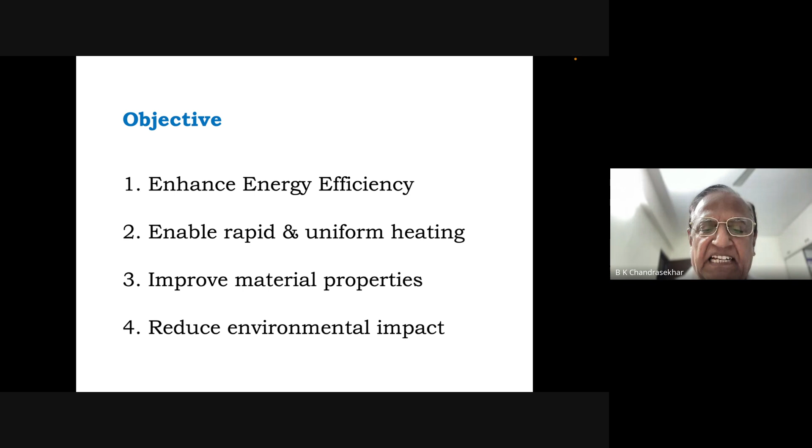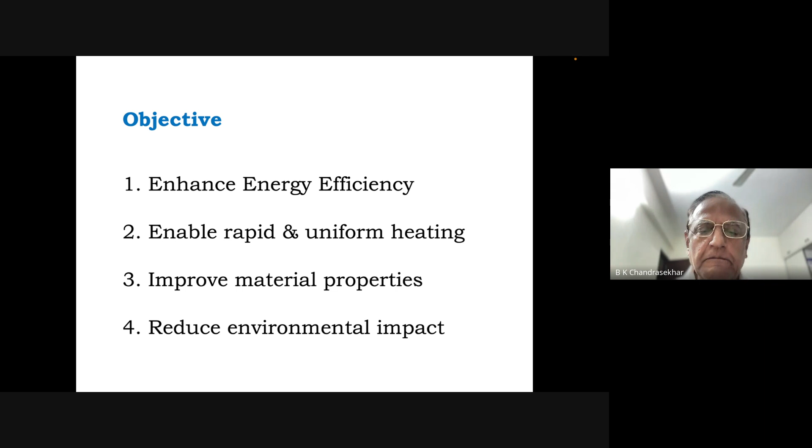I hope my accent and pronunciation is clear to everyone. Once in a while, I will give some time for you to ask questions. So please feel free to ask any doubts or questions, even midway through the talk. Am I clear in my voice? Yes, sir. Thank you.

Now, what exactly is microwave material processing? As you all know, microwaves approximately belong to a frequency range of 300 megahertz to 300 gigahertz. So it's a wide range, and this region is called microwaves. The majority of the frequencies are used for communication purposes, like our mobile phones, radar, and many other things.

But for drying and heating purposes throughout the world, only two frequencies are allowed: one is 2.45 gigahertz, and the other one is 915 megahertz. Only these two frequencies are allowed for industrial purposes of heating and drying.

And over the years, a large number of different sectors, including ceramics, polymers, metallurgy, composites, food processing, even waste disposal, and all possible sectors, one can use microwave very efficiently and at a relatively lower cost.

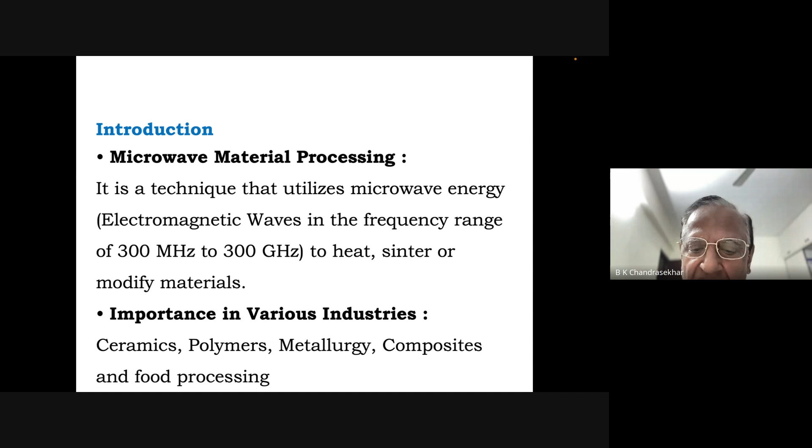So I was talking about the lower carbon footprint and other things. Basically, microwave can be used for any sector where there is a requirement of any type of heating. The normal way of heating is typically, if it is a foundry type of application, people use induction heating for melting metals and so on. For ceramics and other materials, people use resistance heating. Even for polymers, they use resistance heating, like in an oven.

So in what way is microwave superior over conventional heating? As I mentioned earlier, it is an extremely fast method of heating, therefore your process time is very much reduced. There are applications where the process time can be reduced from 8, 12, 14 hours conventionally to less than 1 hour using microwave. That gives you tremendously higher productivity and throughput without compromising on the quality of the product or on the cost. And it is a highly energy efficient method.

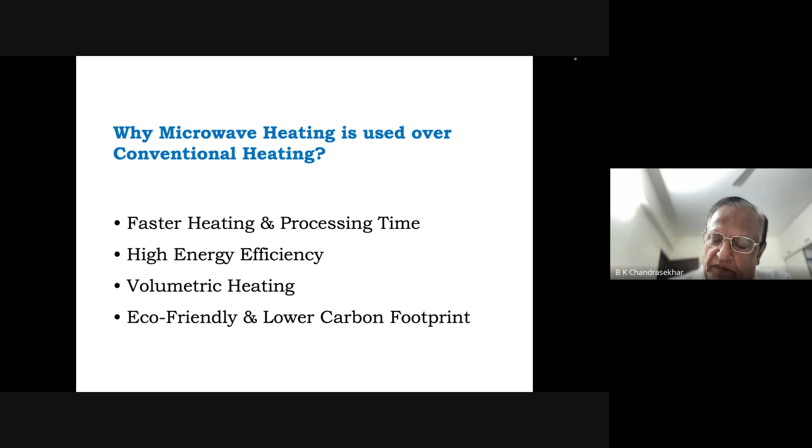Now, this is a summary of some of the things that I have already talked about. As I mentioned earlier, we only use 2.45 gigahertz. That's the one particular frequency that is normally allowed in India for this type of application. We call the heating method dielectric. This method is based on what is called the polarization of the samples. And we will talk, either in this talk or the next, a little more in detail about the principal method by which microwaves interact with the material so that heating takes place.

Third thing is it's a non-contact method. The sample is not coming in touch with heaters and things like that. And it can penetrate thicker samples quite well. And it is a non-ionizing radiation. That means there is no risk involved like cancer and other things. And there are a lot of microwave myths associated, and I would like to spend some time on this a little later.

Now let us understand what exactly happens when microwave radiation is incident on a sample. Microwave is very similar to light. Therefore, the incident microwave radiation can get reflected, transmitted, or absorbed in the material, just like light, and it can also get scattered. All these mechanisms do take place.

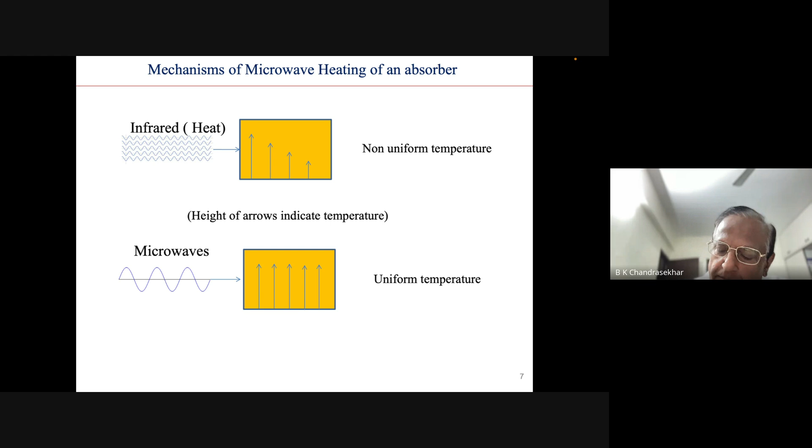The energy efficiency is very high in microwave heating, almost to the extent of 80 to 90% in some cases, because only the sample gets heated and the surrounding crucibles, the insulating materials or any other thing is not getting heated. Therefore, there is a tremendous amount of energy savings compared to conventional heating. And in some cases, you can heat only a portion of the sample selectively rather than the bulk of the sample, which is not possible in the case of conventional heating.

And again, the uniformity of heating is much better in microwave heating compared to conventional heating because of the volumetric heating mechanism that I explained earlier. Now, before I go further, I would like to know whether there are any questions.

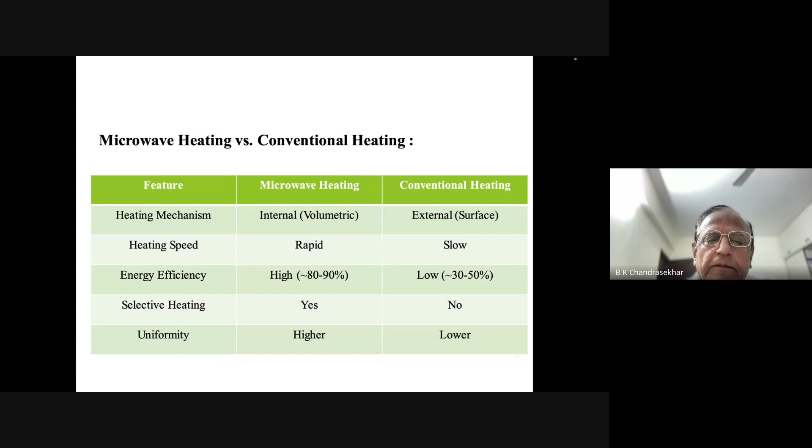Now, I keep talking about electromagnetic properties. Basically, there are 2 or 3 electromagnetic properties that are very important for microwave applications. One is called the dielectric constant epsilon. This epsilon is a measure of the capacity of the material to store energy, store charges. And the other one is called epsilon double prime, sometimes called epsilon 2, which provides the amount of heating, because of the absorption, the transformation that takes place from absorption to high temperatures. So epsilon 1 and epsilon 2, sometimes called epsilon prime and epsilon double prime, are the 2 important parameters which one should know when dealing with microwaves.

These 2 parameters are dependent not only on the wavelength of the microwave, but also on the temperature. This graph provides an overview of how the dielectric constant epsilon 1 or epsilon prime varies with temperature as well as with frequency. As you will see, as the temperature is increased from 0 degrees to 20, 60, 80 degrees centigrade, the dielectric constant becomes lesser and lesser. That means the capacity of the water to store charges is very much reduced.

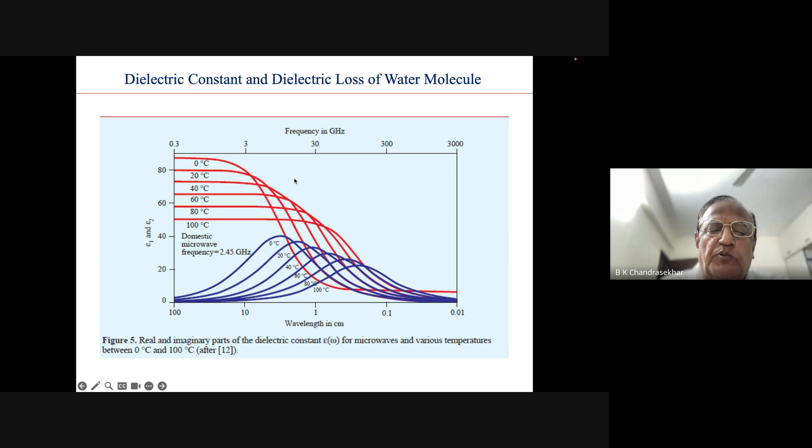Now, there are a lot of myths associated with microwaves. I'm sure you all would have heard sometime or the other on this point. Does anyone know about some of the comments that you have received in the public domain about microwaves? Hello?

In case you have not heard, about 4 or 5 years ago, there used to be a WhatsApp message floating around very widely saying that Samsung is going to stop manufacture of cooking ovens by 2024 or 2025 because some laboratory in the US has confirmed that cooking food using microwave causes cancer. This is basically a fake message that is being sent to harm Samsung or other reputed manufacturers of microwave ovens.

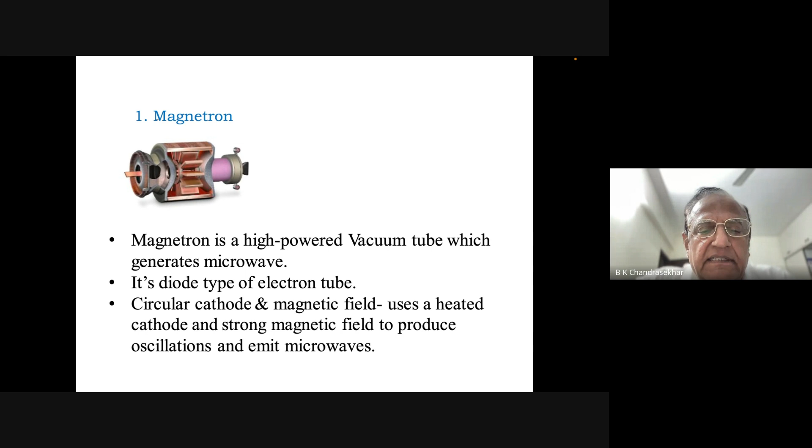In fact, this technology is quite complicated, and to the best of my knowledge, most of the microwave magnetrons are imported into the country. I don't know about any defense related labs which make their own, but at least for household kitchen type of applications, the magnetrons are usually imported. And even our company, Enerzi Microwave Systems, we also import the magnetron from outside. This is the one that generates the microwave energy. Then there is a waveguide.

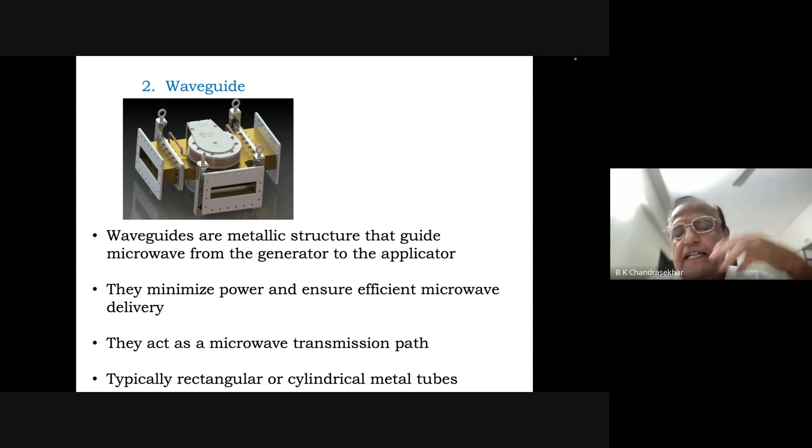This waveguide is usually some kind of a metallic structure that allows the microwave to travel from the magnetron to the other parts of the oven or a furnace or whatever it is. And usually in this process, we want to ensure that the energy of the microwave is not lost. Therefore, everything is getting reflected without any absorption, and therefore the efficiency of transmission is very high. These waveguides are typically either rectangular or cylindrical in nature, depending upon the end application.

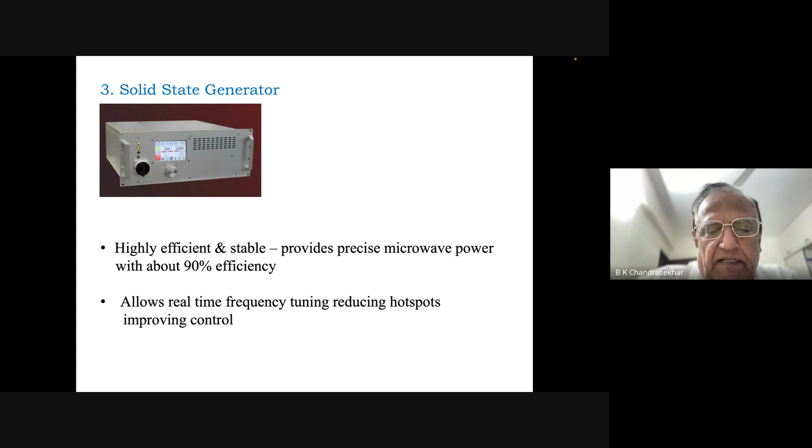The third part of the system is what is called the solid state generator. This basically allows the control of the microwave power. In most of the systems, one will be able to vary the power of the microwave magnetron from very low to the maximum level. So these solid state generators take care of that, and also allow the fine tuning of the frequency required exactly to 2.45 gigahertz.

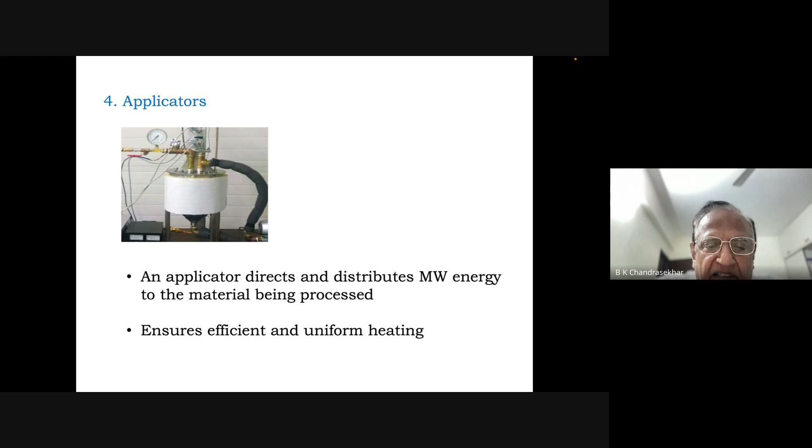And the last component is what is called an applicator, which directs the energy from the waveguide into the material or the object or whatever it is that needs to be processed. It's called an applicator. Basically, these are some kind of a funnel shaped material, and this allows efficient and uniform heating of the object.

Now, let us talk about some examples where the microwave is used for processing of materials. The first one is ceramics and composites.

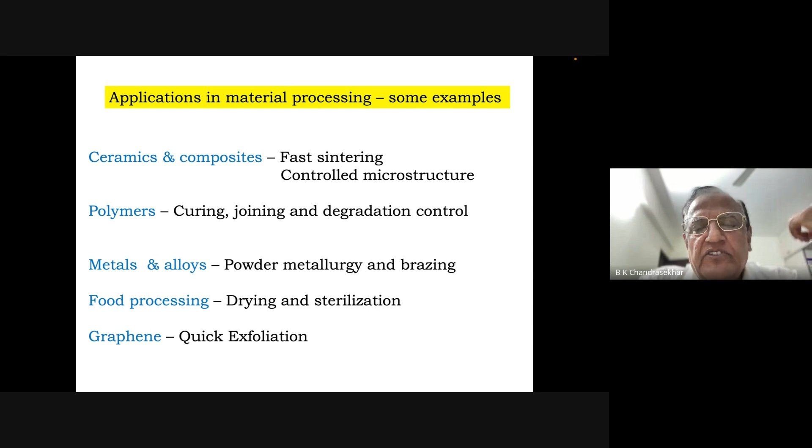As I mentioned earlier, ceramic means usually inorganic materials like alumina or aluminum oxide, magnesium oxide, some silicates, porcelain, zirconia, titania, so on and so forth. These are all very high temperature materials. Typically, the melting point of these materials is about 1500 degrees and so on.

And one very good example would be the alumina substrate that is used in integrated circuits. You make a high alumina material, which is very thin and extremely flat, on which you deposit your circuits. And that alumina material also acts as an insulator for the rest of the electronic system, but also provides a conducting path for the heat that is generated in the circuit.

And the strength of this material depends upon what is called the microstructure. That means when you look at the sample under a microscope, typically a scanning electron microscope, you will look at what are called the grains of the material. That means the particles are attached to each other with some particular size. This microstructure controls the macroscopic property of the material.

For example, let us say that you are having a tungsten carbide material, and tungsten carbide is supposed to be an extremely hard material, and it is also supposed to be a very strong material. In order to get a very strong and hard tungsten carbide material, the microstructure has to be very fine. That means the grains of tungsten carbide as seen in a scanning electron microscope should be very small, typically of the order of 1 micron or 1.5 micron.

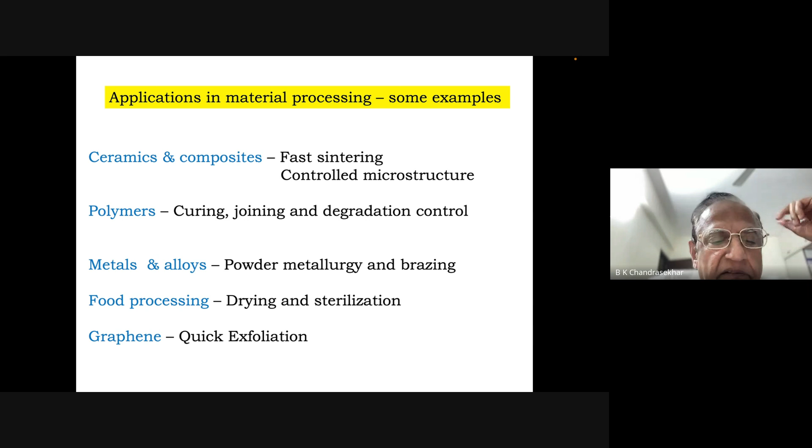The other application in food processing is what is called sterilization. Most of the food items do get some kind of bacteria and other things, and they spoil the food. By giving a microwave treatment to the food, all these viruses, bacteria, and other microorganisms are completely destroyed, and therefore the food will last much longer. This is being done very widely in Western countries. But in India, it is not being done to the extent that is required.

And the last one, as an example, I'm talking about graphene. I am sure most of you would have heard about graphene. It's one of the most wonderful materials that has been discovered in the last 15-16 years. The standard way of making graphene is to take a graphite material and inject it with some ions like potassium in between the layers of the graphite, and then quickly heat it to about 900 to 1000 degrees centigrade, so that the layers of graphite are separated, giving rise to graphene.

This process is quite time consuming, because you need to heat the material to 1000 degrees centigrade, and you cannot heat it very fast by conventional methods. And we in Enerzi microwave system are able to do this task within less than 5 minutes. We take the treated graphite material, expose it to microwave, and within 5 minutes or even less, the temperature goes up to 1000 degrees centigrade and exfoliation takes place. Any question on this?

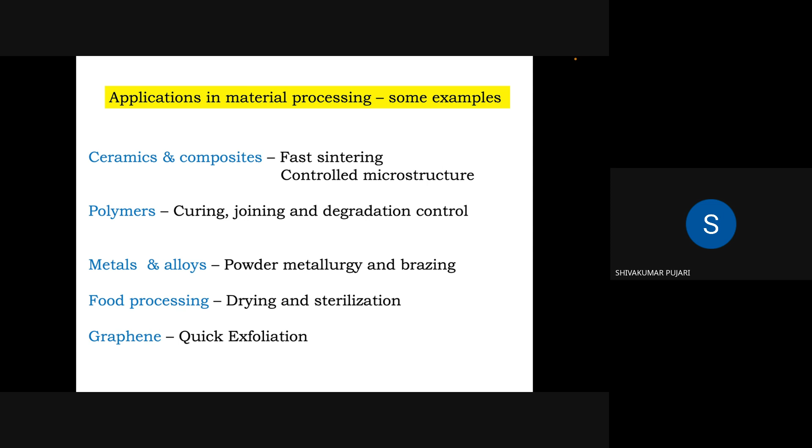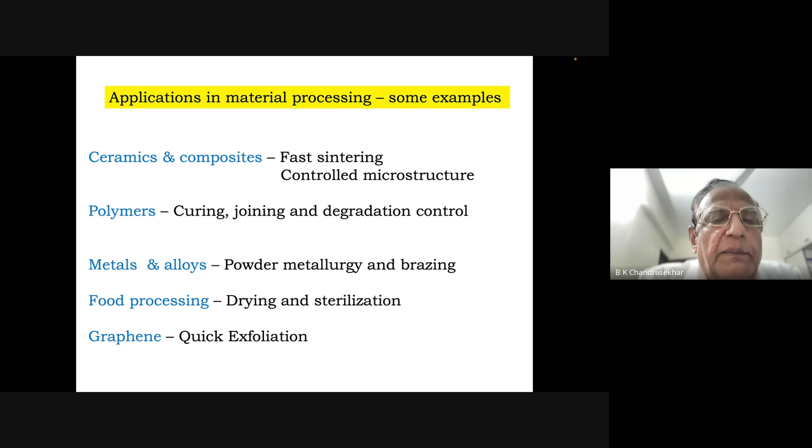Now there is one more issue that comes up: some polymers or even ceramic materials do not absorb microwave, so what to do with them? Suppose I have a ceramic material and I apply the microwave, it doesn't absorb. Then how do I sinter it? There is a technique for overcoming that, and I will talk about it a little bit later.

So basically, the advantages of microwave processing are, definitely, it is a very, very fast process. Instead of cool to cool taking 1 day or an 8-hour shift, it can be done in a few minutes, or at best less than 30 minutes. Energy efficiency is very high, and superior material properties. And I will talk about the microstructure in my next talk.

As I have already mentioned, when you heat a material to a high temperature for a long period of time, like 2 hours or 1 hour, then there is a mechanism that takes place called grain growth. That means the grains become bigger and bigger, and as they become bigger, the mechanical properties, transparency, optical properties and other things are compromised. By using a microwave, you can avoid this grain growth of materials.

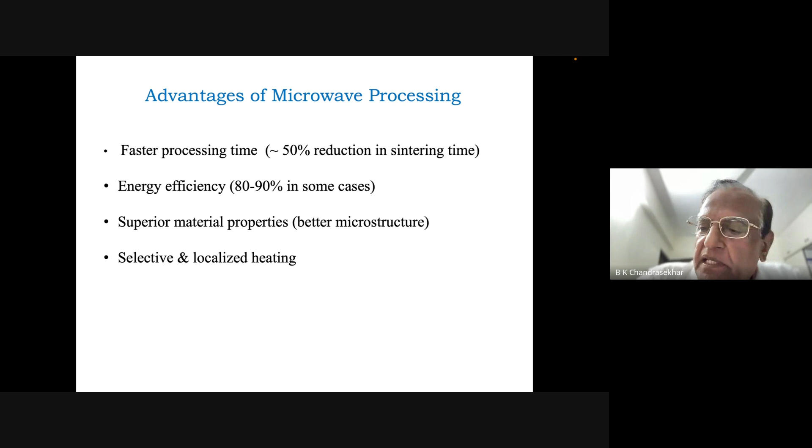Then there is selective and localized heating. For example, you take a plastic and for some reason you need to make it into a mixture with some microwave absorbing material, then you can still heat the material.

Now, let me talk about what exactly are the future trends in this particular area. One is what is called the hybrid heating technique. Let me elaborate a little bit on this. Let us take a standard material called aluminum oxide, which is a workhorse for most ceramic materials. Most ceramic materials have a certain amount of aluminum oxide present in them, and aluminum oxide is transparent to microwaves.

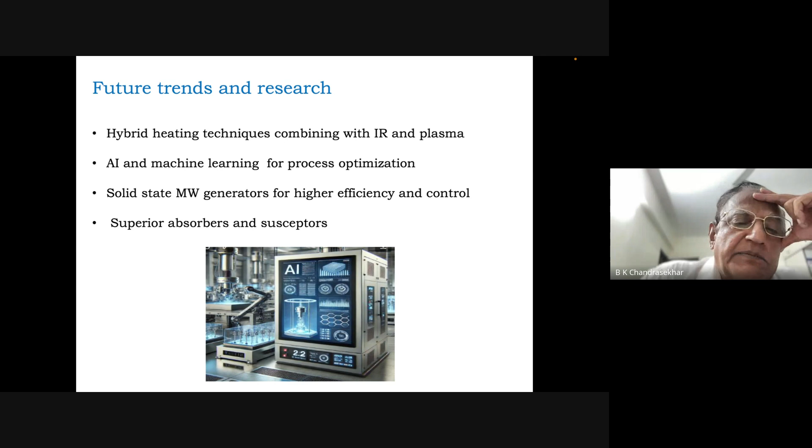So when you want to sinter aluminum oxide and put it in a microwave furnace, it doesn't absorb the microwave radiation, and therefore it cannot be sintered. So one method for overcoming this problem is you take the material and heat it with resistance heating up to about 600 degrees centigrade.

That means you use electric heaters and heat the sample to 600 degrees centigrade and then apply the microwave. What happens is that at about 600 degrees centigrade, the electromagnetic properties of that aluminum oxide material change and it starts absorbing the microwave radiation. So this system is called a hybrid technique.

So you preheat the material with a conventional method like resistance heating, and once about 600 degrees centigrade is reached, you switch that off and go in for microwave radiation. Then you can take the sample to 1400, 1500, 1800 degrees centigrade also. So this is one method of heating materials which don't absorb the microwave initially. Surprisingly, most materials at elevated temperatures become microwave absorbers, though they are not microwave absorbers at room temperature. So once you know this, this technique can be used.

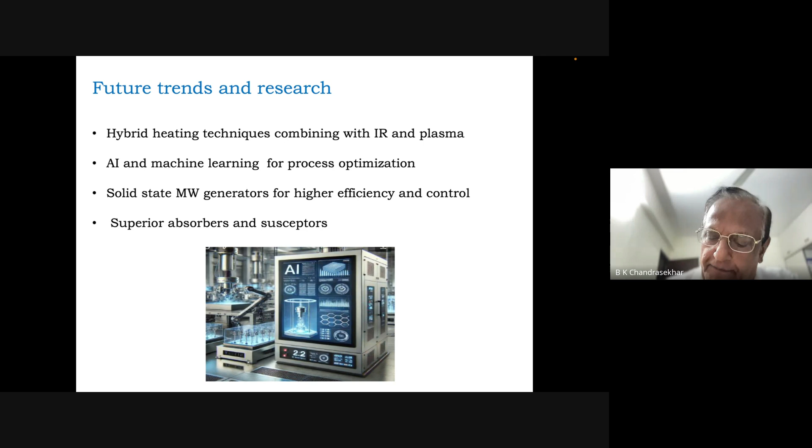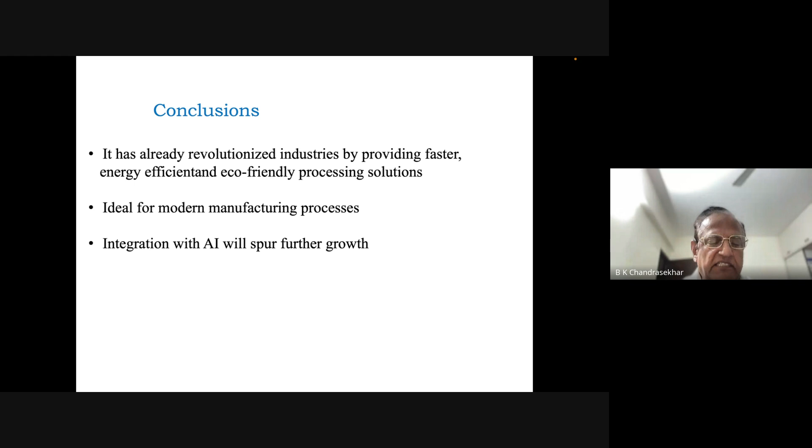So in conclusion, I would say that microwave processing has already revolutionized industries by providing faster, energy efficient and eco-friendly processing solutions. It is very widely practiced, and in my next talk I'll give specific examples so that you will be able to appreciate it. Since most modern manufacturing processes require some amount of drying or heating, this is an ideal method compared to conventional techniques, and hopefully integration with artificial intelligence will spur further growth in this field.